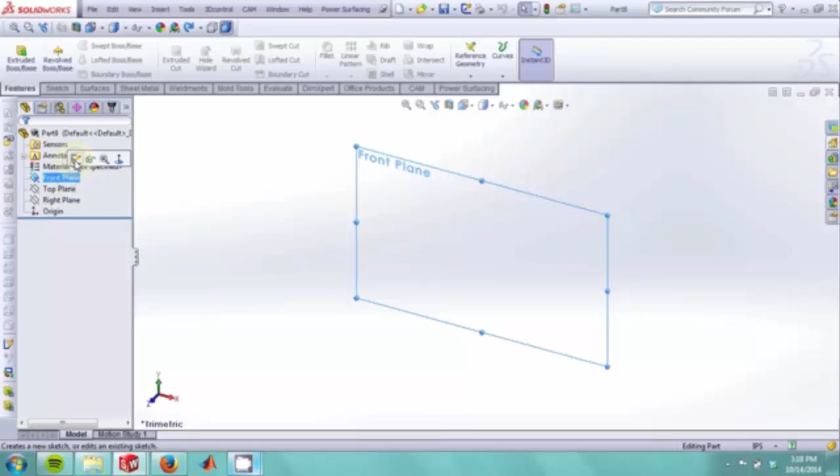So we start a new part. And notice how the previous cup has a main body, which is a simple cylinder, which is actually symmetrical around its axis. We can take advantage of this fact and create a cylinder just like the previous one.

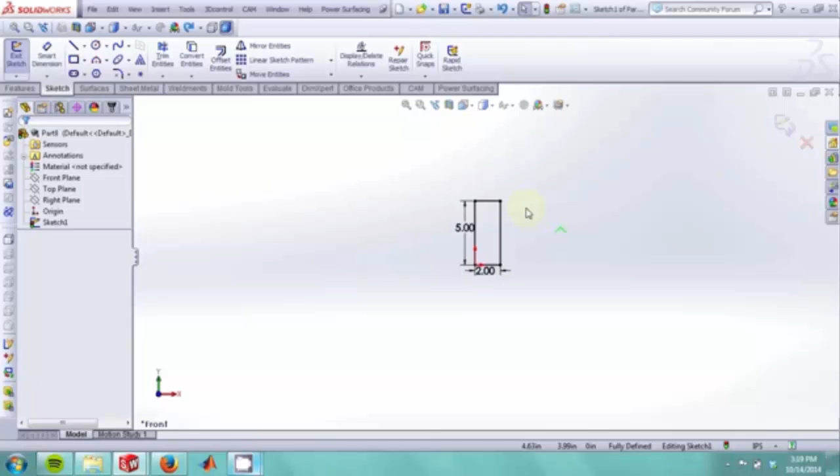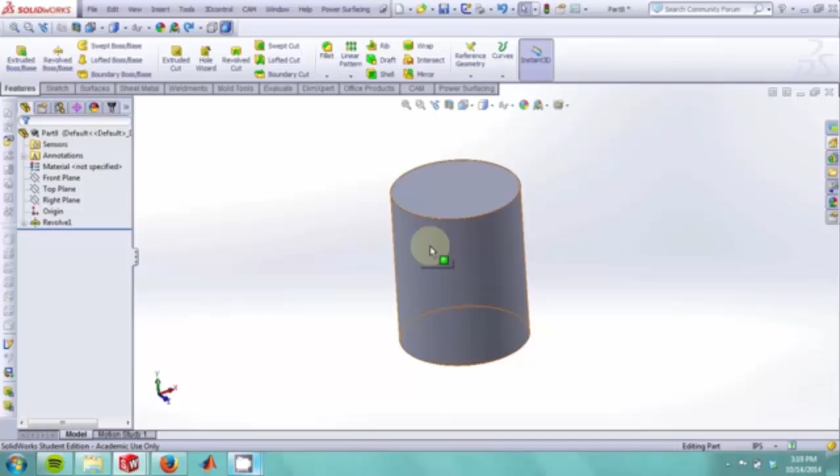So all I'm doing right now is making a cross section, and I will now revolve it around this axis of revolution, which I just specified. So this is a simple way to create the main body of my cup.

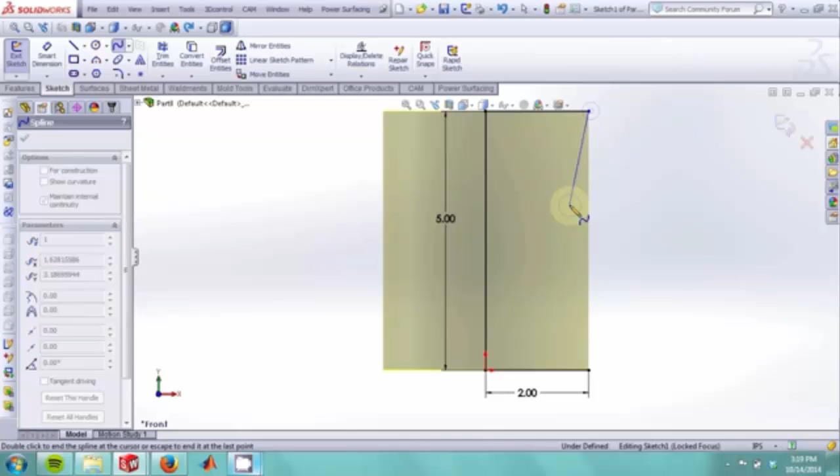However, since I used a revolve feature instead of an extrude feature, I can actually get rid of this straight line and replace it with a spline in order to achieve a more organic shape. By moving around the control points of my spline, I can control the resulting shape. I can also manipulate the control vectors of the spline to change the shape.

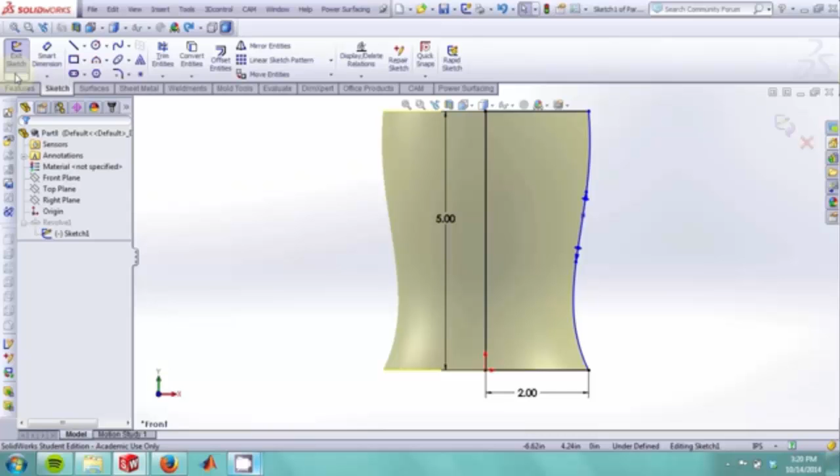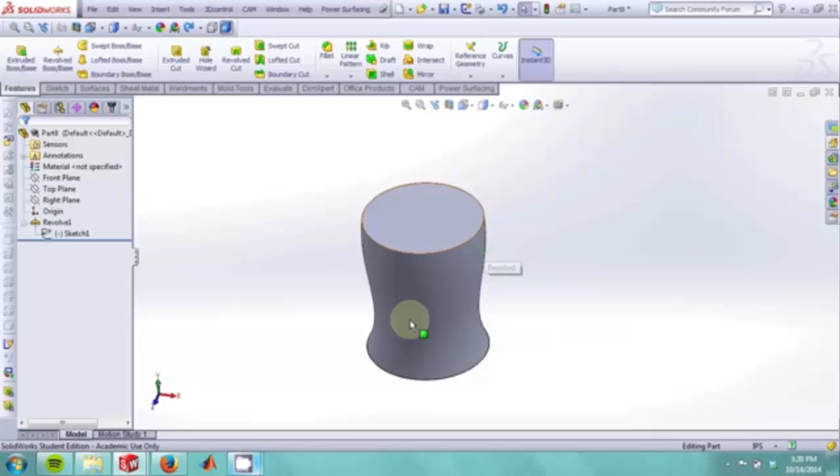We now exit the sketch. On the previous model, we made a sketch on this face, which was offset to the outer edge, and then we did an extrude cut. However, if we did this in this particular case, it would result in a part that doesn't have uniform thickness. When dealing with more complex shapes such as this one, it is often useful to use the shell command.

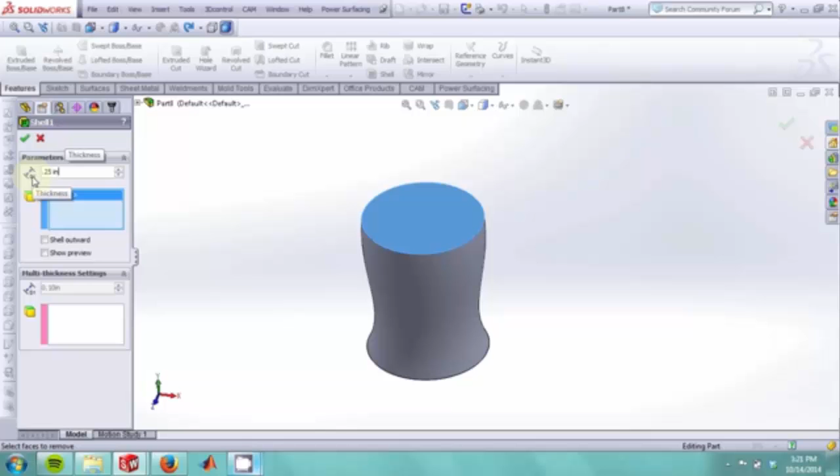The shell feature asks you to select the face which you would like to remove. So we will get rid of this top face, and now we're going to specify a thickness, which is 1/4 inch. In just one step, we have completely shelled out our shape.

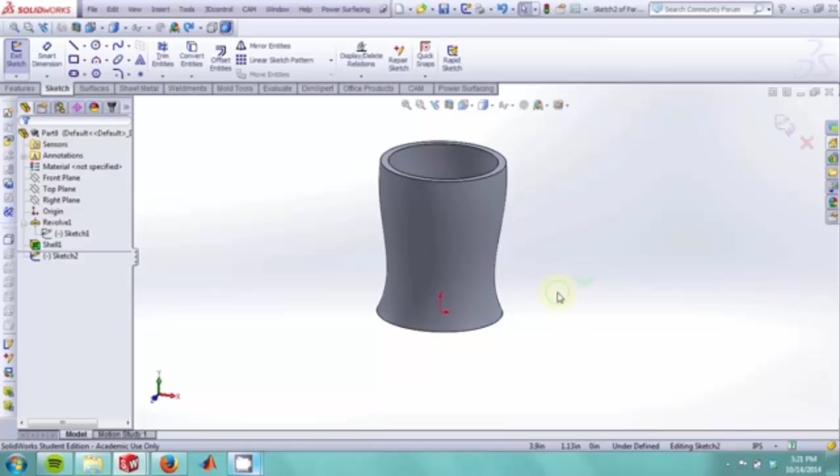Now it's time to add the handle. To do this, we're going to start by making our control spline. So once we've moved around the control points and we're happy with the way it looks, we can exit the sketch, and the next step is to create a reference plane.

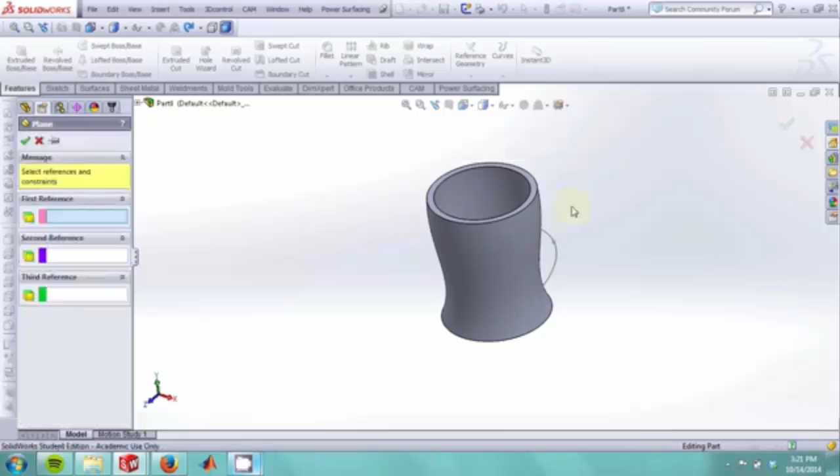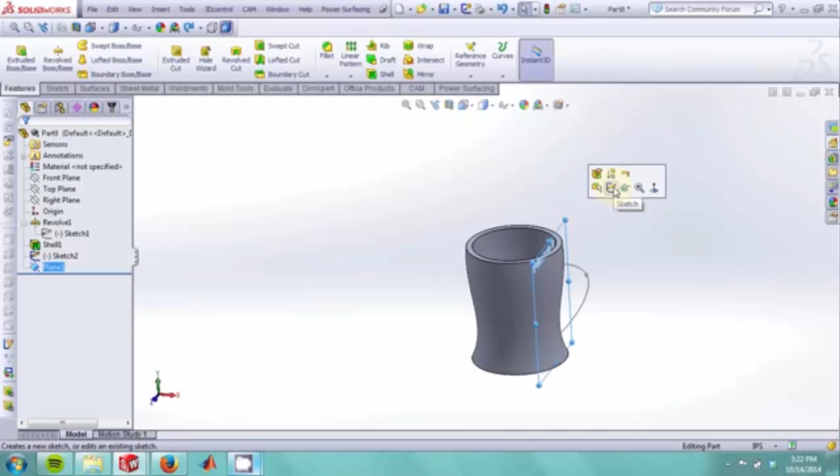So this plane needs to be coincident to the starting point of my spline, but it must also be parallel to the right plane. So now that my plane is fully defined, I click OK, and I make a sketch on it. In the previous model, we made a handle that had a circular cross-section. In order to keep things more interesting, we're going to make one with a rectangular cross-section.

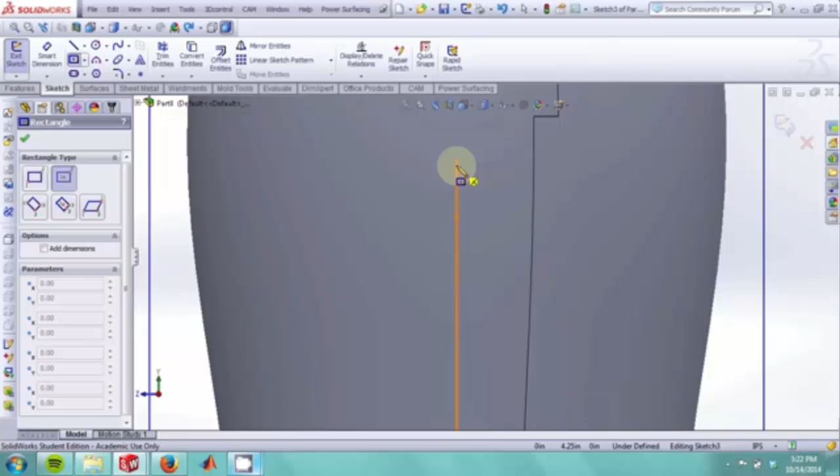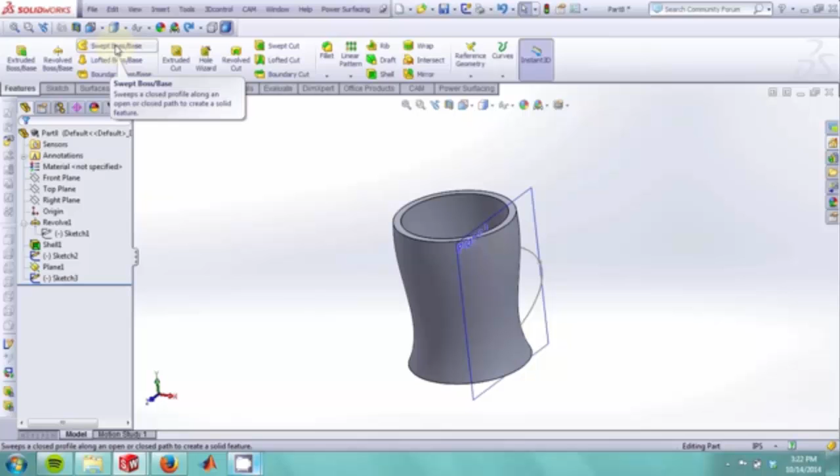Okay, I have aligned the center of my rectangle with the starting point of my control spline. So now I click on it, and I click again to generate the rectangular cross-section. I can now exit the sketch, go into the Features tab, and select the Swept Boss Base feature. I start by selecting the rectangular cross-section, and then I select the guide curve and hit OK.

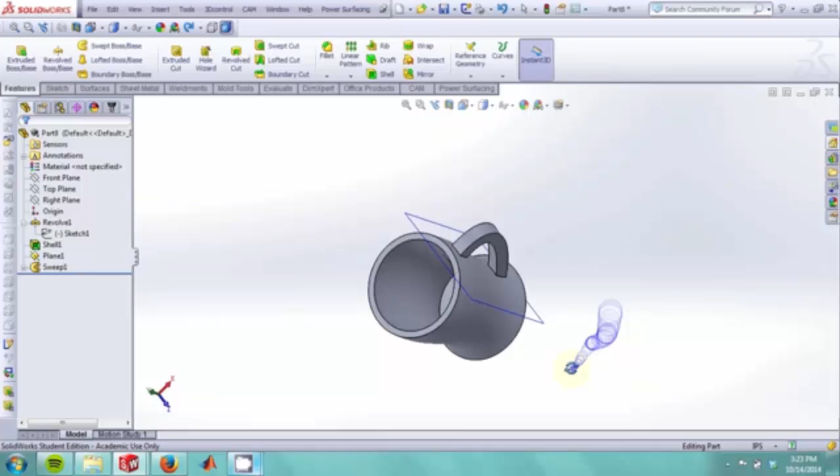As you can see, I now have a bunch of excess material in the inside of my cup. To get rid of it, we can use a Revolved Cut command. But first we need to make a sketch. So we select the right plane, make a sketch on it.

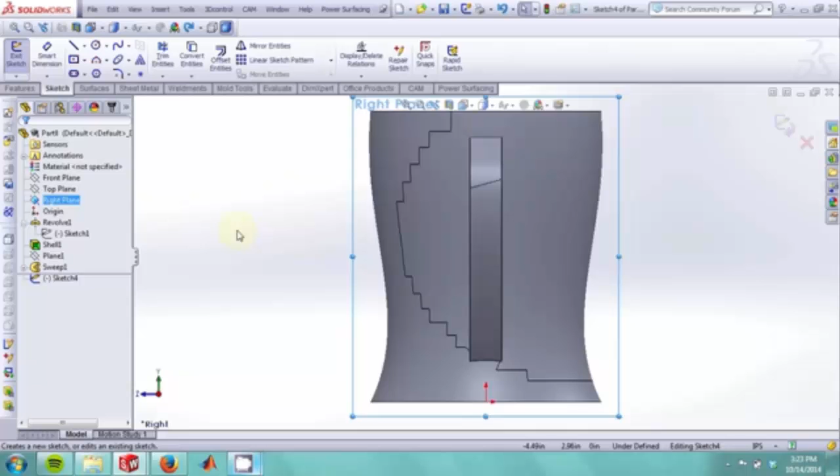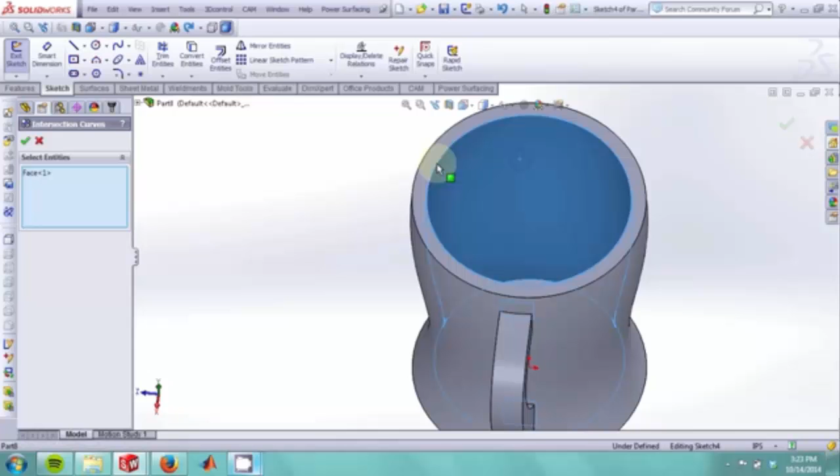And now we would like to import the intersection curve defined by the intersection between the inner face of the cup and the sketch plane that I'm currently using. To do that, I go to this drop-down menu and select intersection curve. I then select the inside face of the cup, and Solidworks generates these two splines over here. I can simply delete one of them, and then I must close my sketch.

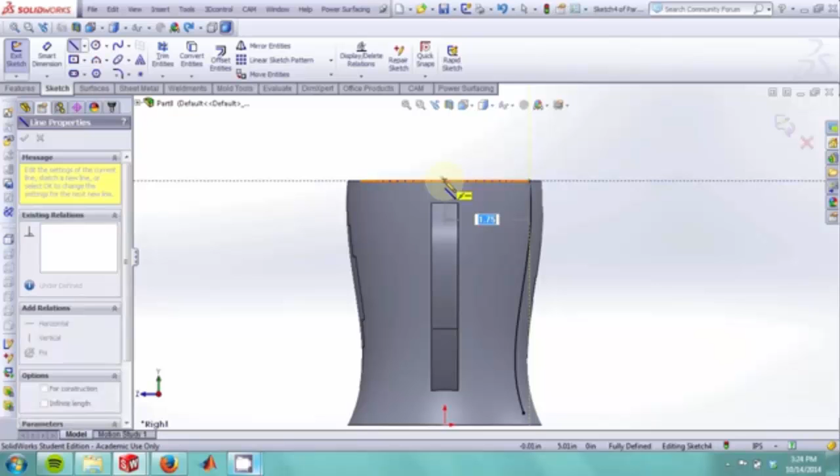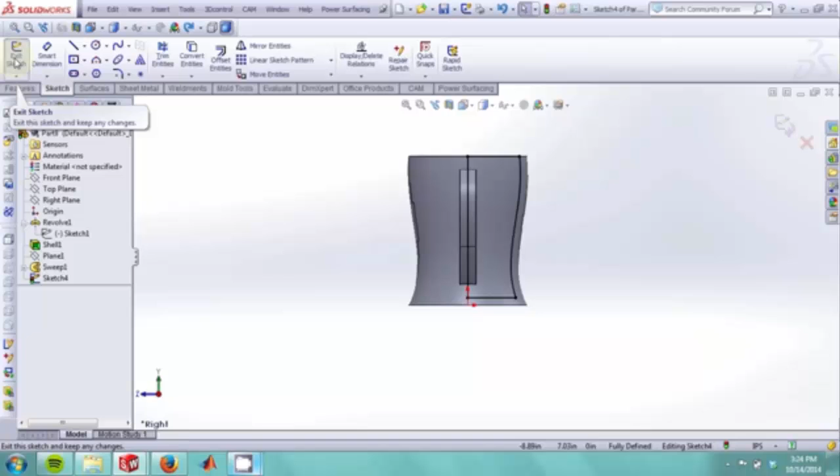It's important to note that this line should be vertical and also aligned with our center point. We now exit the sketch and select the Revolved Cut feature. And then we define the axis of revolution and hit OK. Now you can see that the excess material has been removed.

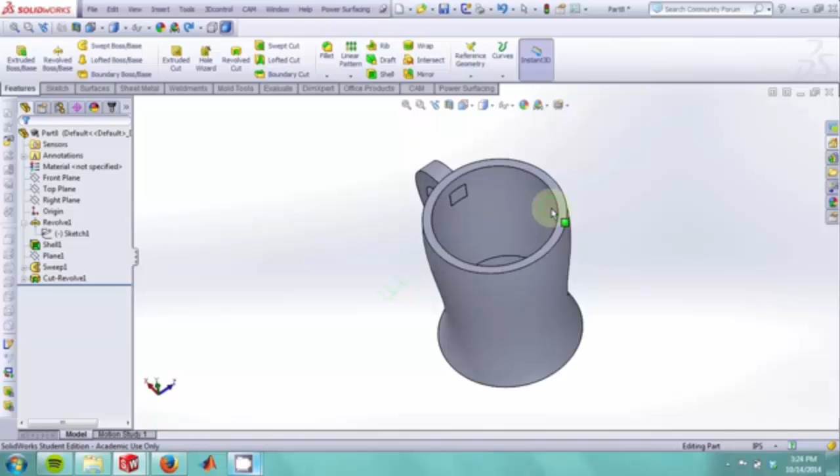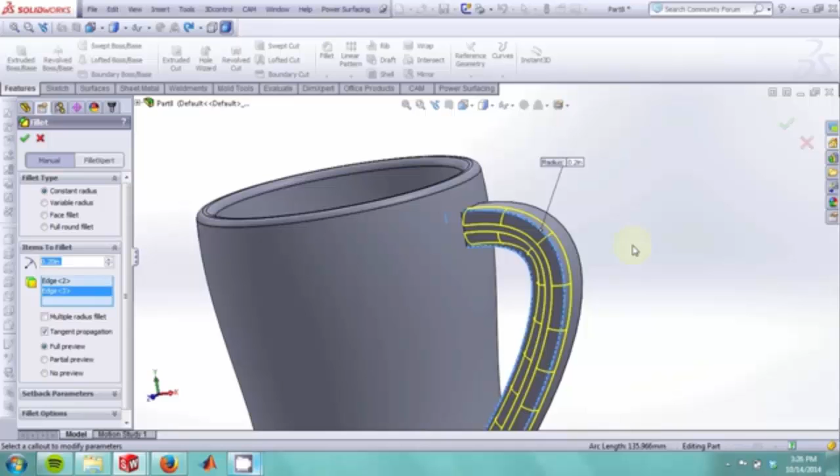We can now add some finishing touches by applying a fillet on the top lip. Now we will simply just select the edges of our rectangular handle. And we can create a separate fillet between the interface of the handle and the main body of the cup.

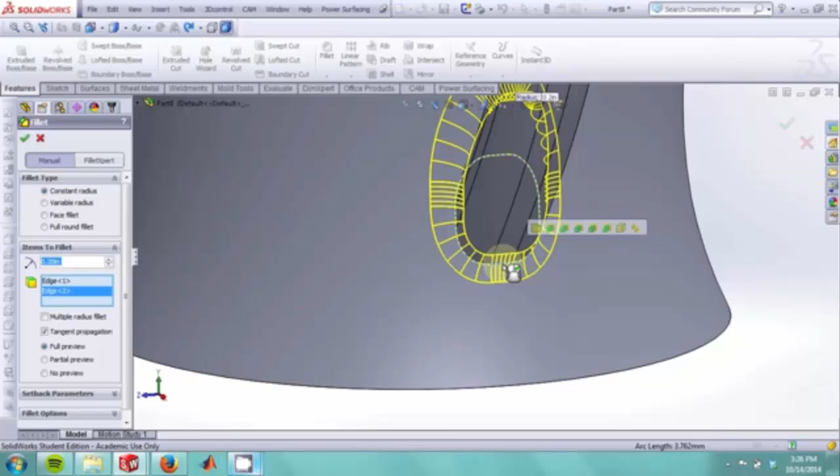As you can see, by using a similar amount of features, we have created two different cups.